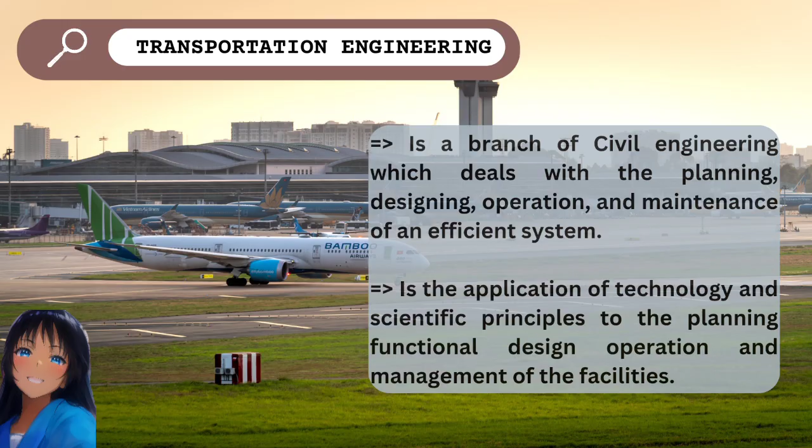Transportation engineering is a branch of civil engineering which deals with the planning, designing, operation, and maintenance of an efficient system. It is the application of technology and scientific principles to the planning, functional design, operation, and management of the facilities. It is the responsibility of the transportation engineer to plan, design, build, and operate the whole transportation system in an effective manner for the safe and efficient movement of the traffic.

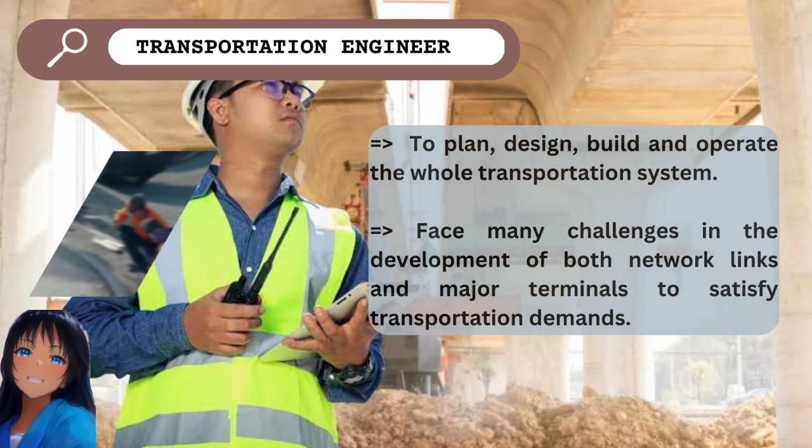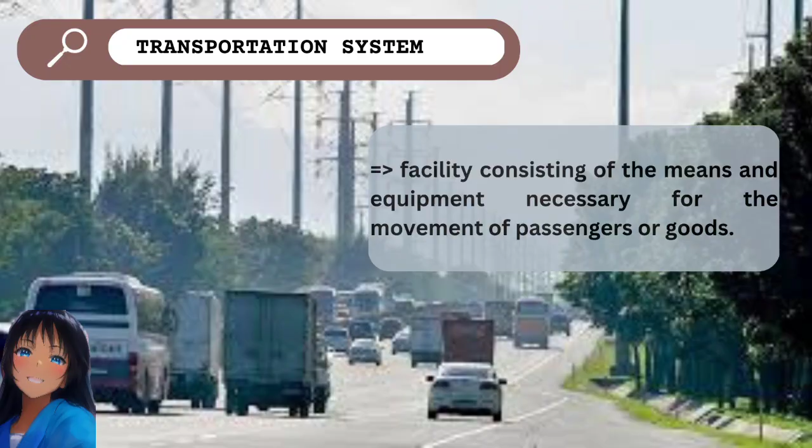Transportation engineers also face many challenges in the development of both network links and major terminals to satisfy transportation demands. And the transportation system is a facility consisting of the means and equipment necessary for the movement of passengers or goods. In the transportation system, we have the modes of transportation such as the roadways, railways, waterways, and airways.

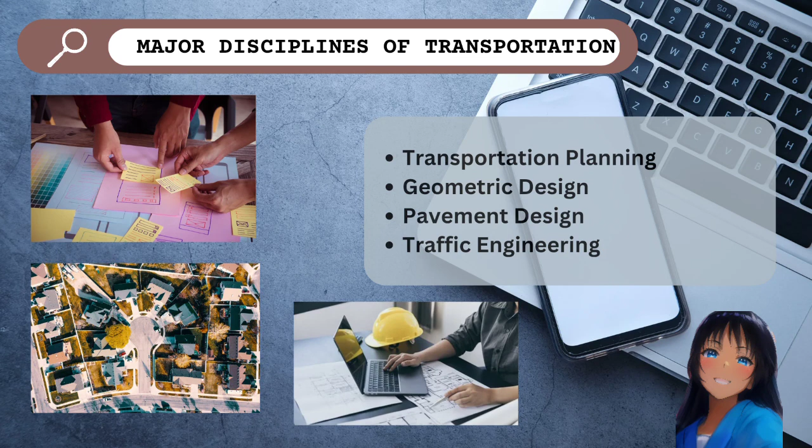And one of the steps in the analysis of a transportation system is to consider its elements such as the persons, roads, and vehicles. And now the major disciplines of transportation engineering can be broadly divided into 4 major parts, such as transportation planning, geometric design, pavement design, and traffic engineering. Now let's proceed to our second destination.

We are now at our second destination, which is the Introduction to Highway Engineering, where we will know about the history of highway engineering. It will give us an idea about the roads of ancient times. The roads that we have today make our life easier when we travel to another place, right? Because if there are no roads that are safe and comfortable, it will be hard for us to transport compared to before. So we have here the ancient, Roman, French, British, and modern roads.

So let's see first the ancient roads. The developed human pathways and emergence of trackways, and then the invention of the wheel, animal-drawn vehicles, and roads with harder surface emerged around 3500 BC, and then the earliest authentic record of road was found from the Assyrians around 1900 BC. Next is the Roman roads.

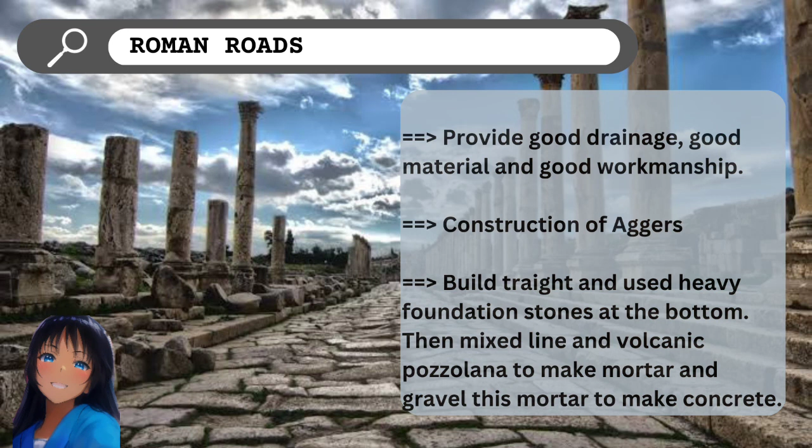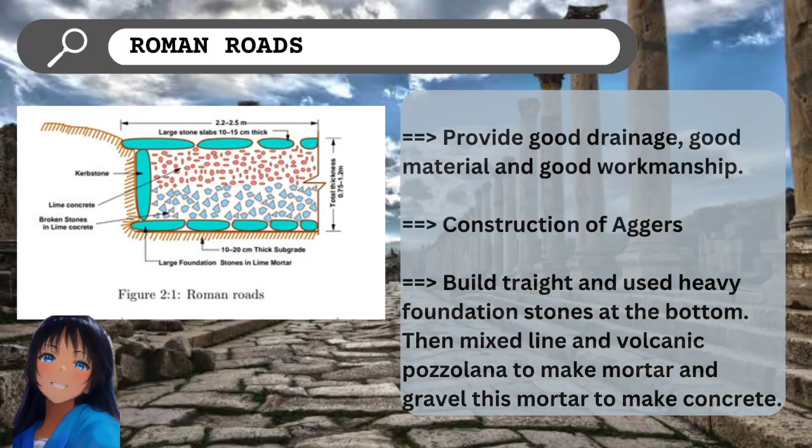They recognized that good road construction provides good drainage, good material, and good workmanship. And also the construction of the agger, which was a raised formation up to 1 meter high and 15 meters wide, topped with a sand leveling course. The main features of these Roman roads are: built straight and used heavy foundation stones at the bottom, then mixed lime and volcanic pozzolana to make mortar, and gravel with this mortar to make concrete.

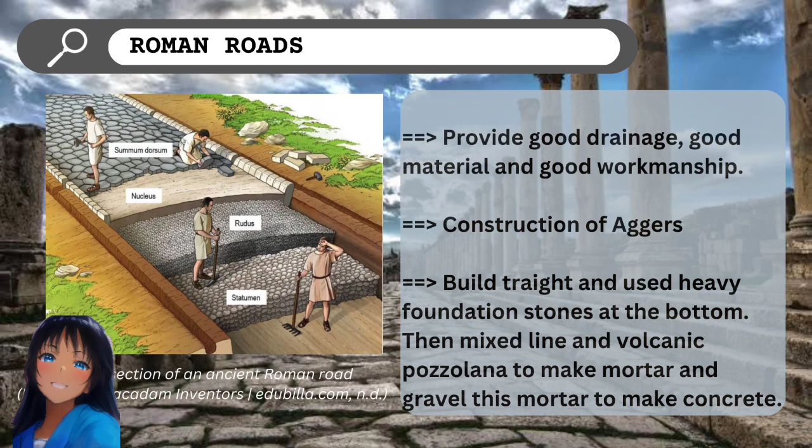Next is the French roads. Tresaguet in 1764 developed a cheaper method of construction than the Roman practice. The pavement used 200 mm pieces of quarried stone of a more compact form and shape, with smaller pieces of broken stones compacted on the larger stones to provide a level surface. Finally, the running layer was made with a layer of 25 mm sized broken stone.

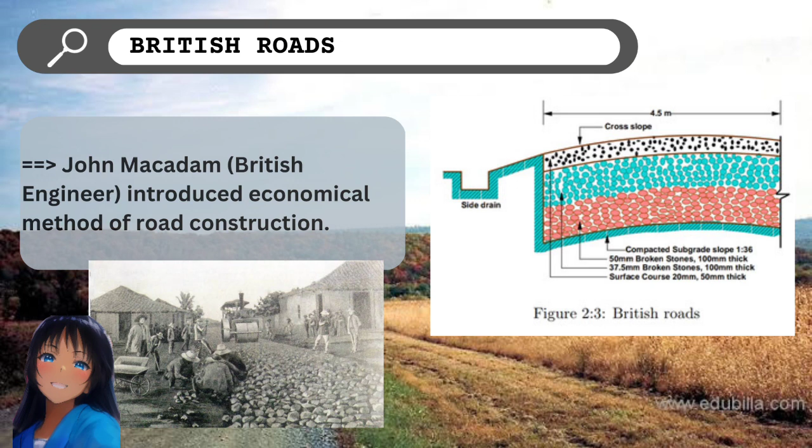Next is the British roads. John Macadam, a British engineer, introduced an economical method of road construction, using an important recipe of more than 250 millimeter layers of well-compacted broken angular stone to provide strength, stiffness, and a better running surface.

Followed by the macadam construction method are the modern roads. Use of bituminous concrete and cement concrete are the most important developments, and advanced, cost-effective construction technologies are used.

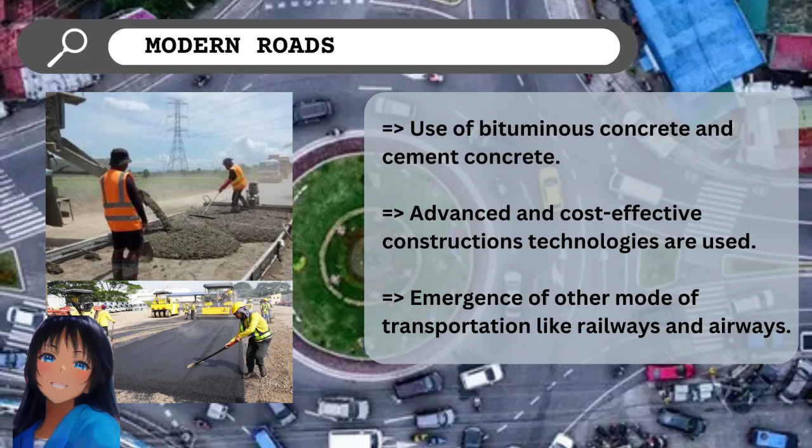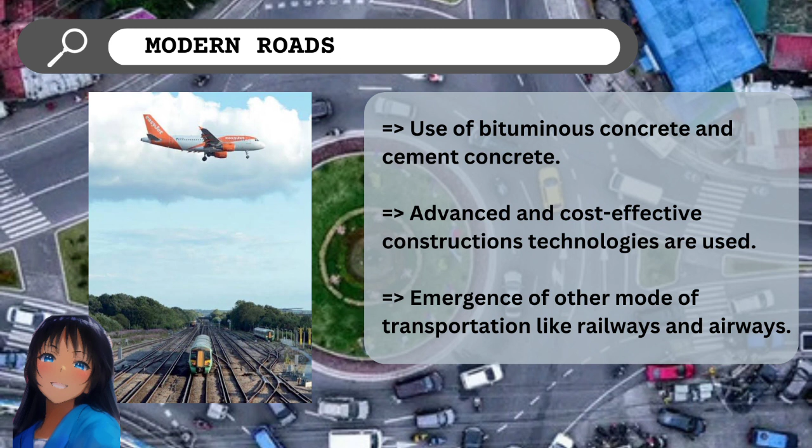By then, the scope of transportation developed largely, leading to the emergence of other modes like railways and airways, along with growth of public and private transport. This led to vehicular traffic and many problems, increasing attention toward control of vehicles, such as traffic signals and speed limits at specific zones.

With all this advancement for better roads came the emergence of transportation planning and demand management, which set strategies aiming at maximizing traveler choices for an efficient transportation system. Now let's proceed to our destination 3, where we will talk about the role of transportation in society.

We have now arrived at destination 3, the role of transportation in society. Transportation is one of our resources to go to another place for different reasons, and we will explain here how transportation is used and relates to human activities. We have 4 different roles of transportation.

These are: 1, economic role of transportation; 2, social role of transportation; 3, political role of transportation; and lastly, environmental role of transportation. First is the economic role, where economics involves production, distribution, and consumption of goods and services.

Next is the social role of transportation, whose contribution plays a major role, as seen from influencing the formation, size, pattern, and development of societies, especially urban centers.

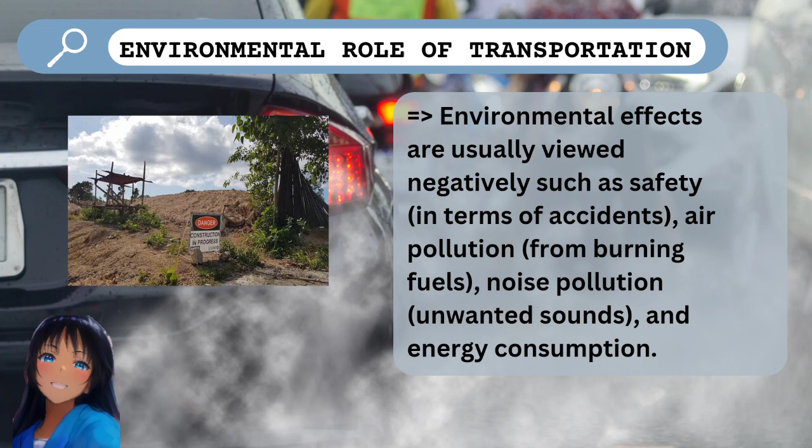Lastly is the environmental role of transportation, whose effects are usually viewed negatively, such as safety in terms of accidents, air pollution from burning fuels, noise pollution from unwanted sounds, and energy consumption.

Now we will go to our last destination, the factors affecting transportation. We have arrived at our last destination, factors affecting transportation. These are human factors, vehicle factors, braking performance, and road factors.

First is about us, the human factors. Road users' performances vary from individual to individual, such as variability, reaction time, critical characteristics, visual acuity, and driving, walking, and other characteristics. Next is the vehicle factors.

Vehicles have different features such as design, dimension, weight, axle configuration, turning radius and turning path, visibility, and acceleration characteristics. Second to the last is braking performance, which is of prime importance to highway safety.

It is the performance of a traveling vehicle while slowing to completely stop at a determined distance, affected by the type and condition of the road. Lastly are the road factors: road surface, lighting, roughness, pavement colors, night visibility, and geometric aspects.

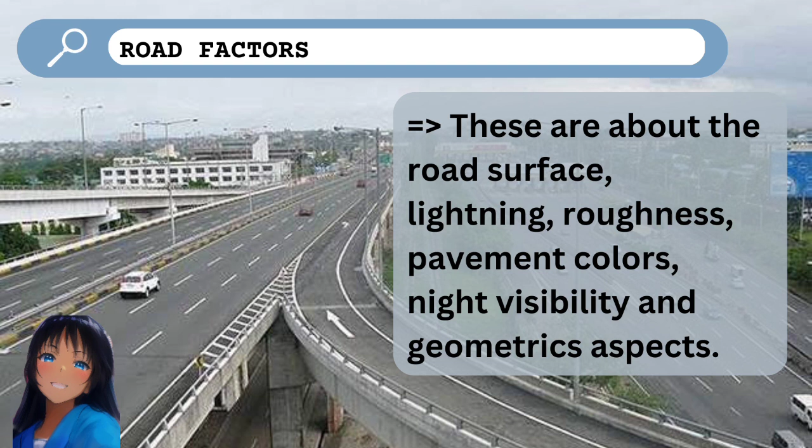All these factors greatly influence the geometric design as well as the design of control facilities, which we all need to consider for better and safer travel.